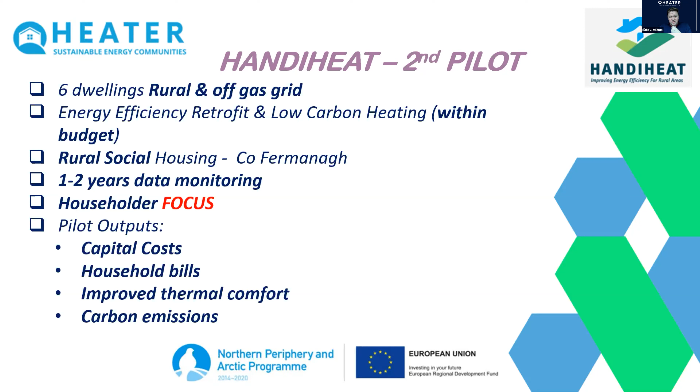In the Handiheat project, we looked at energy efficiency first. We wanted to find a reasonable level of energy efficiency improvements and keep it under £10,000. The actual total cost of the measures we put in was around £8,000.

We wanted to try and get the SAP, the thermal efficiency, up to a SAP band C, primarily through cavity wall insulation, loft insulation, fitting windows to a passive house standard - in other words, using certified passive quality air tape - and non-intrusive air tightness measures where possible.

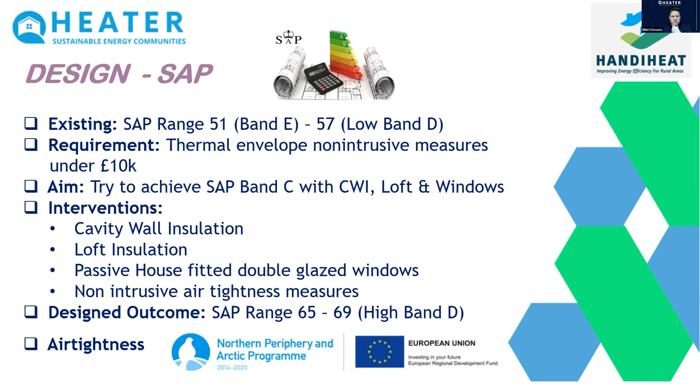The end result, we didn't actually reach a SAP band C with all this, but we reached a very high band D, between 65 and 69. We also looked at air tightness, and we improved it from a range of 10 to 12 down to 5 to 7. So in short, energy efficiency and air tightness was a key pillar at the start of the project.

As you see here, this is the cavity wall insulation, having been extracted and a new cavity wall insulation put in.

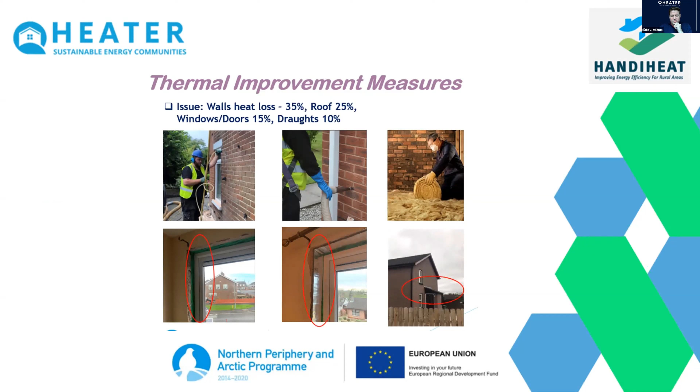Here's the loft insulation that we put up to no more than 400 millimeters. We fitted the windows to a passive house standard, and we put aerogel in it as well. We tried to look at the cold bridging areas and put more insulation there to stop cold bridging and improve the air tightness coming into the property.

We also had two main models. One looked at low carbon heating with the hybrid oil and air source heat pump, and the second used power generation and power storage.

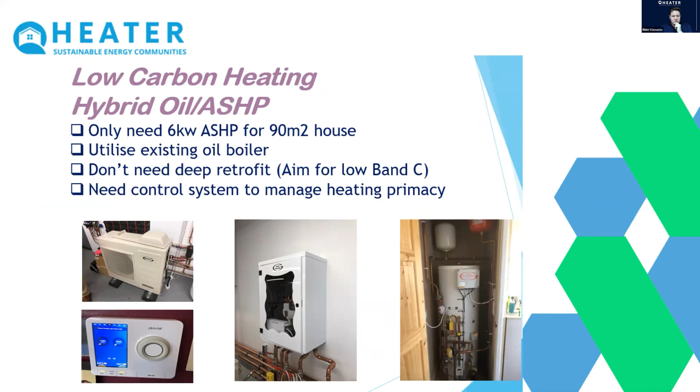First of all, here we used the Grant hybrid heat pump, which is an EvoLink, the small box in the middle. It has a 6 kilowatt air source heat pump, and then a high efficiency hot water cylinder as well. The time clock was a local product from Climote, again because of its functionality and because it's very easy for people to use.

This is a system which was fitted. As you see, there's the air pump with the fan on it, your existing oil boiler, and then your EvoLink up at the top. Your radiators were increased by 50% across the whole house to try and have a greater area to put out the heat from the heat pump.

The aim at the start of the project was to try and give more primacy to the heat pump and then use the oil boiler in colder weather. The initial thoughts from the first winter were to have all heating below 3 degrees used by the oil boiler because it affects the coefficient of performance.

But actually this winter, we haven't got the results in yet. We've increased the temperature to +5 to try and get more use of oil, because we're using very, very little oil in the two houses which we're using.

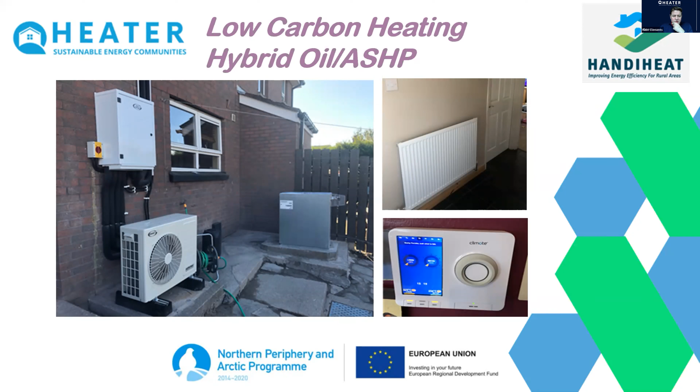The second project we had was looking at energy generation and energy storage. This involved an 11 kilowatt battery and a 2.5 kilowatt solar panel, and then using electric heating with it.

Effectively, what is shown was that over the summertime, there was a lot of export. The tenants' bills were down to around £5 per week. But there's very much a measurable reduction in carbon for it.

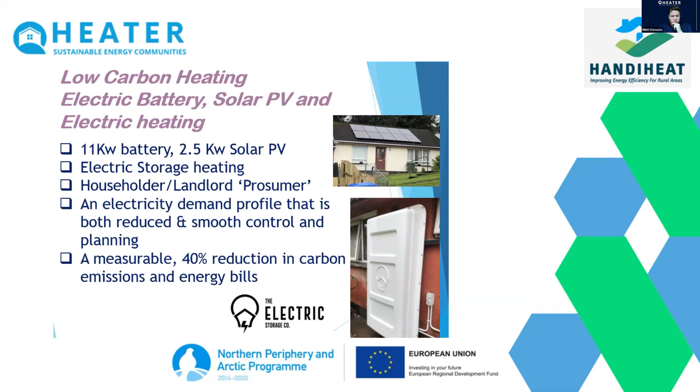But yes, the final results this year will be coming out at the end of March, and we'll have the final report. Measuring the data was very important.

We have all the different system providers with data loggers, and that all feeds into Ulster University. So Grant data logger, Sonnen, we've got our own electric and heat monitors, and then we've got the Climote as well. The plan is all this data will be available at the end of the project, which will be coming to an end at the end of March, although the kit will stay in after that for our heating season.

The initial feedback, and this is actually feedback from last winter, we haven't got the feedback in from this winter. With the hybrid, they were using around £13 to £16 extra in their use of electric, but that's offset by savings in oil.

We're able to look at their previous bills, and we're able to look at the current data on the houses. Going forward, in our next project, we'll put in live monitoring data on which we can see the equivalence of the two things balancing out.

The heat is different. It's better for the planet. It does feel warmer, particularly with the battery and PV houses, and the air tightness had reduced dramatically to between 5 to 7. In context, a new built house will have an air tightness average around 3 to 5. So getting between 5 and 7 is definitely good news for spending £7,000 to £8,000. And as we see, the carbon reduction is cut down by a half.

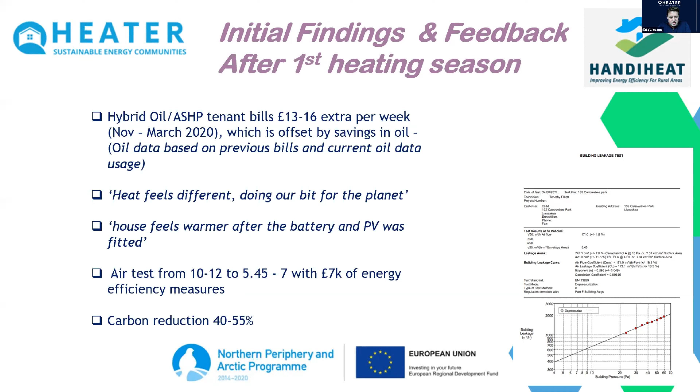Again, this is some initial summaries, and I'm just trying to give you more of the highlight things, some of which is maybe fairly obvious. The capital cost of the heat pump and additional insulation is a lot more than just status quo. We're spending £7,000 to £8,000 on extra insulation, and then there's the cost of the heat pump. The heat pump for this here costs €3,500, and that would be the ex-works price.

The additional insulation, which we've talked about - we do believe, on fabric first, in energy efficiency, and really our current thinking at the moment is we're still trying to develop decarbonised solutions, but we do know solutions for energy efficiency, and typically these houses are only losing 2 degrees heat per night in January.

That was just looking at data over this last month. We've got air tightness between 5 and 7. So the implication is that by spending under £10,000, we are making a marked difference in energy efficiency, and that's something we should be thinking about doing first.

The householder bills area analysis shows an equivalence between the oil cost and the electric cost, but that does not take into account the fact we've spent a lot of money on energy efficiency, and the capital costs aren't included. So that's very much a householder focused issue, with some issues about perception. This is more about behaviour change.

This is looking at our project, which we're just about starting. Whenever you convert from oil to hybrid, the tenants do not appreciate the cost of the oil heating. Typically we're seeing oil usage previously anything from 25 to 35 to 40 litres per week in an average size social housing. But people who have got a gas to gas hybrid appreciate it, because they're paying the gas top-ups every week. So that's a consideration - people do not know how much money they're spending on the product beforehand.

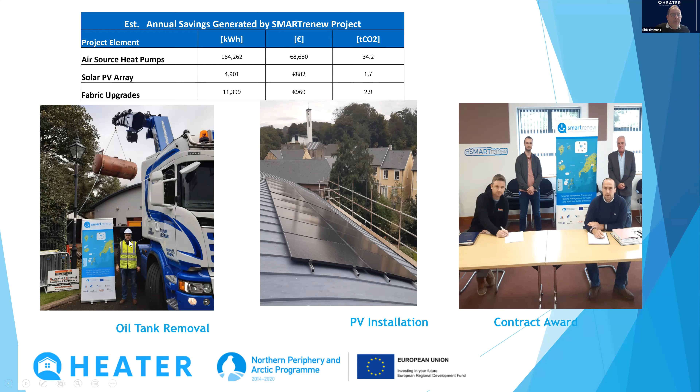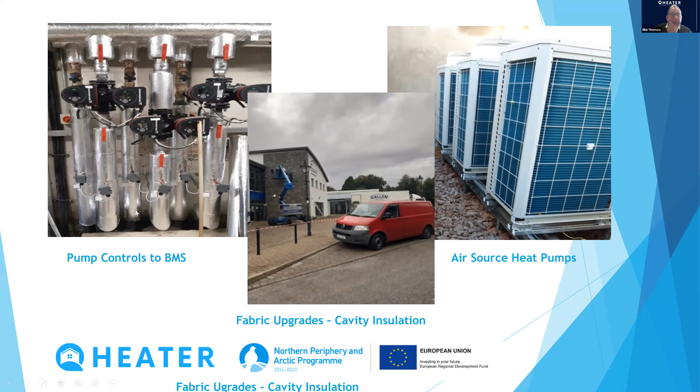Here you can see the air source heat pumps upon delivery, the fabric upgrade with cavity insulation, and pump controls linked to the building management system.

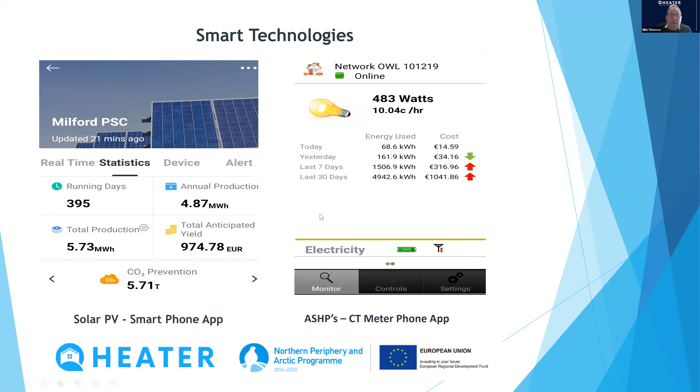So it's been successful, and it's still a learning curve for the council. Things weren't quite as efficient during the summer months as they thought they might be, which was because they switched off their heat pumps earlier. But you can see these diagrams here.

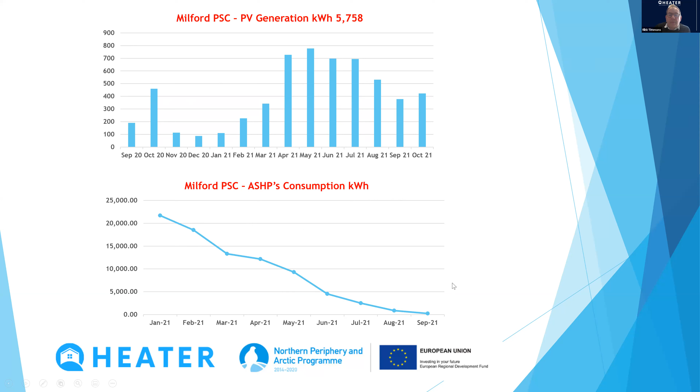You can see the generation from solar energy increasing through the summer months. And on the lower graph, we can see the consumption of electricity.

This covers the period from January 21 right up to September 21. Just on some conclusions before I move on, I'm very pleased with the energy savings they've made already. One of the aims of these projects is to influence opinion and expand beyond the pilots. We're pleased to say that Donegal County Council are beginning to implement this solution on their other council buildings as well, so we're delighted about that.

Moving on to the second pilot I'll feature today, the Derry City and Strabane District Council, where Leo Strawbridge, our partner, is the energy manager. They implemented an intelligent energy management system, or heating management system, for Harbour House, one of their council offices in Derry. They used technology developed and run by a company in County Antrim called HeatBoss.

This provides up to 30% wireless heating savings through wireless heating controls, with lots of advantages in terms of bespoke heating for rooms, automatic control of areas, and setting schedules for heating. We'll look at some of those details.

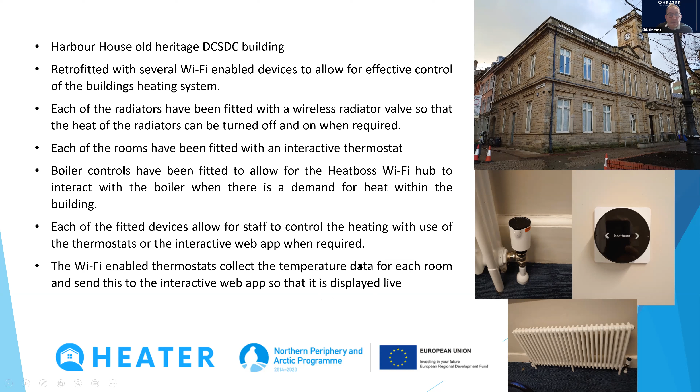These devices allow staff to control the heating using thermostats or an interactive app on the web. The Wi-Fi thermostats also collect temperature data, which can be displayed, and the history of the heating in each of these rooms can be displayed on the app.

These controls also link in with the building management system, and staff can control heat in each room using the Wi-Fi enabled thermostat or through the schedule. Outside of scheduled heating times, the thermostats can be used to boost the temperature in a room when required.

All of the data is gathered. Here are some pictures of the thermostats.

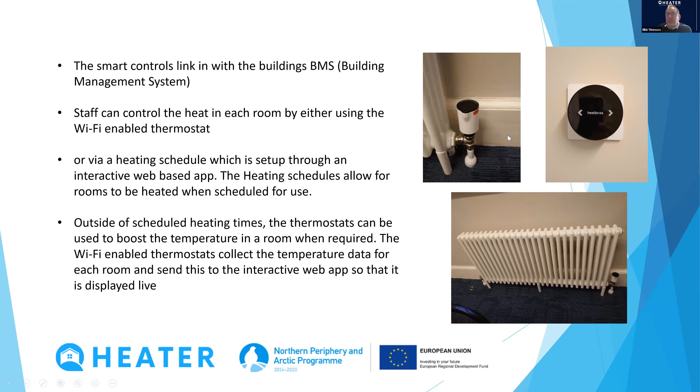The challenges they were addressing were reducing high running costs. They were able to reduce heating consumption by 30%, only heating rooms that were required to be heated and maintaining temperatures well within the limits.

It also provides customizable comfort, so occupants of different rooms can have their chosen thermal comfort. It's a cost-effective, non-disruptive installation, with a typical payback in 2 to 3 years.

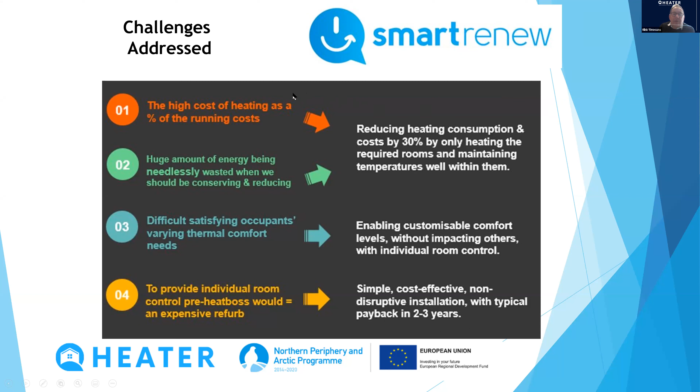That fits in nicely with the aims of the NPA Interreg Energy Priority. The final pilot I'll feature today is our colleagues in Iceland, the Energy Agency in Iceland, Ziggy Fridleifsson and Ragnar Asmundsson.

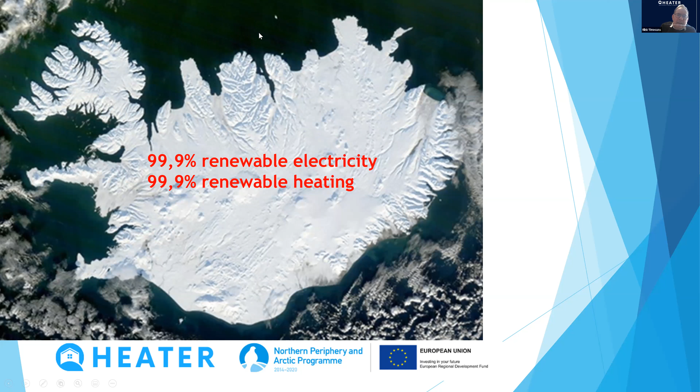Of course, we know where that comes from - mostly from their volcanic hot water, which they use to heat up most of the country. Although there are cold spots, and these cold spots are still reliant on more traditional methods of heating. This island, Grimsey, is one such place.

You can see Grimsey here, a fairly remote place, but it does have a small village with a few hundred people who live here. It's got a church and shops.

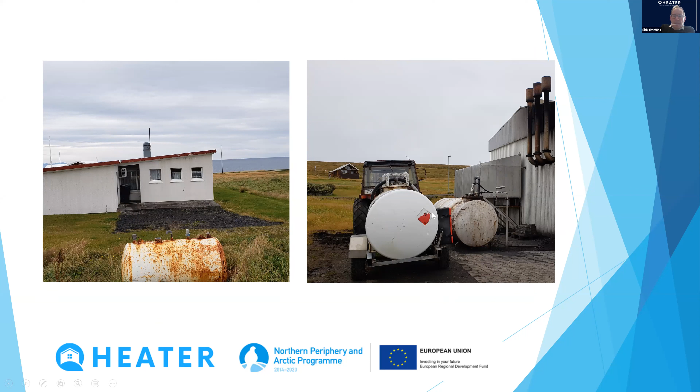I'm sorry, I'll just go back here.

LED lights were being fitted as well, and then they had the practical work of buying and shipping the equipment to Grimsey. They were erecting 2 wind turbines and an 11 kilowatt solar panel installation initially. Of course, they landed in winter on the island and got stuck in the mud and all sorts of things. I've got some pictures of that, but didn't have time to show all of it.

Then they had to make an agreement with the energy company to run and serve the units. It got quite good publicity, even though it's a very small island with a tiny population. It actually captured the imagination of the main country, and the people got behind it, so it got quite a good bit of publicity.

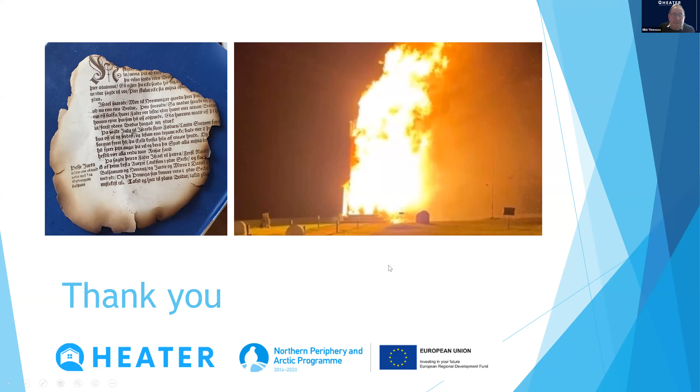At Oulu University of Applied Sciences, we had a smart heat storage combined with district heating to reduce oil use in Kuusamo, which is a Finnish town close to Oulu. This was a large water tank, a huge water tank to store energy in water as heat.

As we know, the capacity for water to store energy as heat is much more efficient than actually driving water down a mountain through a turbine. So it's become more and more popular as a storage method, and this project was also about storage.

We looked at patterns in the Faroe Islands. Bjarni combined borehole thermal energy storage with water storage, ground source heat pump, and PV panels, and he applied this on their actual Environment Agency building. So they're very much looking into borehole technology, geothermal technology also.

One of the side experiments of that was to actually, in a 400-meter borehole, experiment with storing heat in rock down there, as well as storing heat in water. So that's an ongoing experiment.

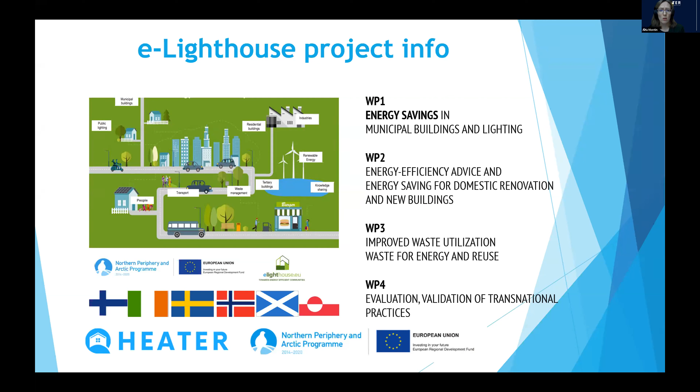And here you can see the partners we have. So we were in Cork, in Oulu Finland, Sweden in Umeå, city of Umeå and the University of Umeå, Norway in Bodø, and then we had Scotland and Greenland, Sisimiut in our project. And then we have the Nordland Research Institute. So here we have the partners who were working with this project.

So what happened, the goal was to support and follow up the retrofit of more than 250 public buildings. They were retrofitted, there was 5% less energy and 3% more renewable energy sources. There was maybe some problems with the renewables because the baseline was very different in each country. And this procedure included 40 deep renovations also.

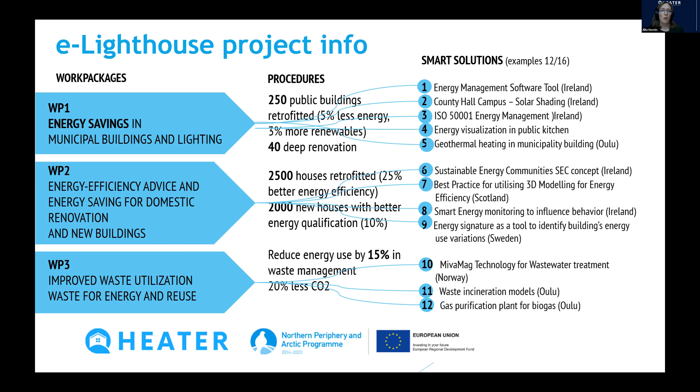And here's the work packages and the results. It was from March 2019 for the final seminar. I will go to this energy saving in municipal buildings. So there was around 240 retrofitted that was done, and 2,420 houses was also retrofitted, and that was done. We succeeded with the new houses quite well also.

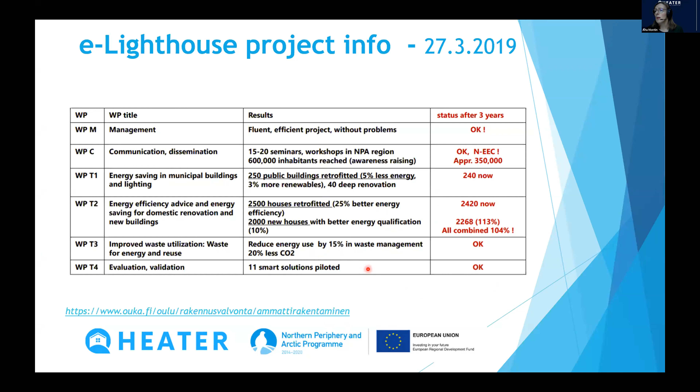And we have, with the evaluation, 11 smart solutions piloted. That was done in this project. We have 3 examples here, quite simple ones, of what was done in this project. So I have example 1 from Sweden.

It was for energy savings in municipal buildings and lighting. I wouldn't say it's a very, very rural area, but it's kind of a rural area in Sweden, in the northern part of Sweden anyway. So the target was to save energy. What was done, it was 44 buildings with improved energy efficiency, mostly schools or preschools.

And implemented actions include LED lighting. This was quite a big role, and then there was some ventilation upgrades done and upgraded steering and control system, more about behavior, and we have some digital control systems in these buildings.

And here are the energy saving results. Total energy saving in these 44 buildings was around 4.2%, which is quite much in northern countries. And we have to remember these buildings are not very old ones, so they were maybe not so in need of retrofitting.

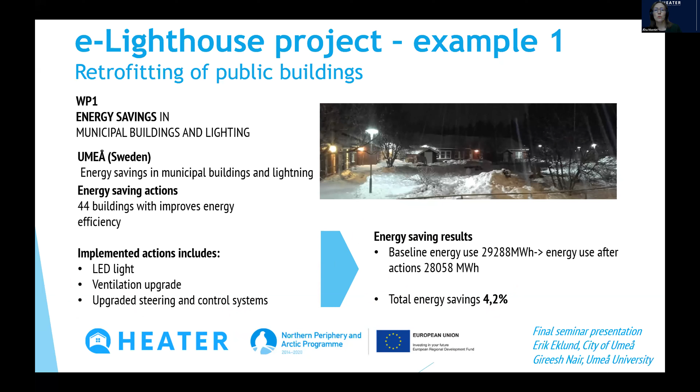So that included 180 households with improved energy efficiency in this project. The actions included heat pumps, which is quite an international way to do it. So you have air heat pumps, more insulation of attic or walls, mostly insulating the attic is more efficient. And of course, the behavior actions and guidance for inhabitants.

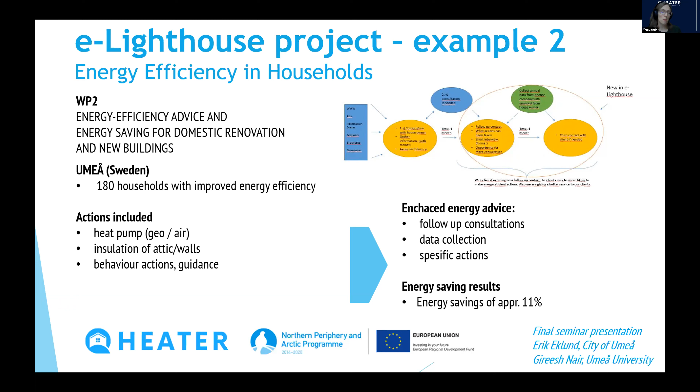So this is the last of the examples. We are going not to Scotland, as I said before, but to Ireland. And this is more kind of the practical solutions.

This is also energy efficiency advice and energy saving for domestic renovations, with 24 retrofit measures evaluated in this NCE Insulation Ireland project. NCE Insulation is a community-based, not-for-profit organization delivering energy-saving measures to homes across Ireland since 2003.

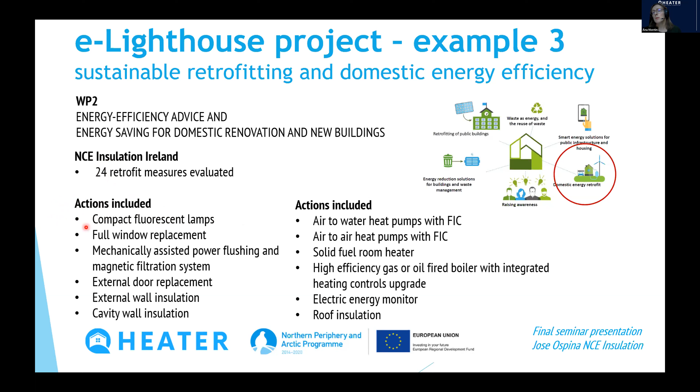The actions included in this project are listed here. There were 24 of them, but I have just the most important ones listed. It's about compact fluorescent lamps - let's see, the next one is maybe easier. Here you can see the total numbers done with these procedures: change of lamps, full window replacement.

These measures or retrofitting approaches are quite different from what we would do in Finland. But you can see the baseline of these buildings to retrofit was quite different from what we had in Oulu. So we maybe wouldn't use the same kind of measures, but these were very efficient in Ireland.

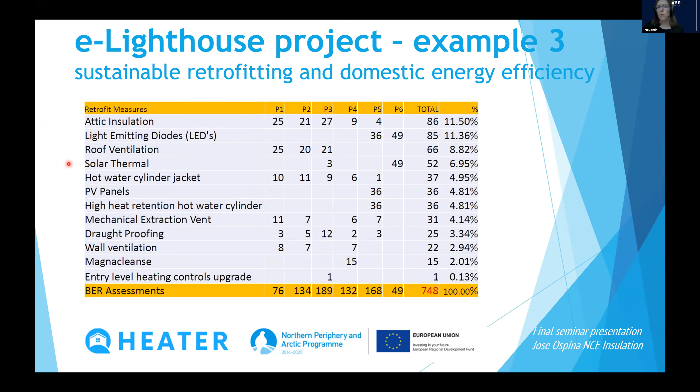I'm not going to study this more carefully, maybe you can get the material from here, you can see what has been done. I have just two points here with the kind of basic measures done: cavity wall insulation and the heating controls upgrade done in these buildings.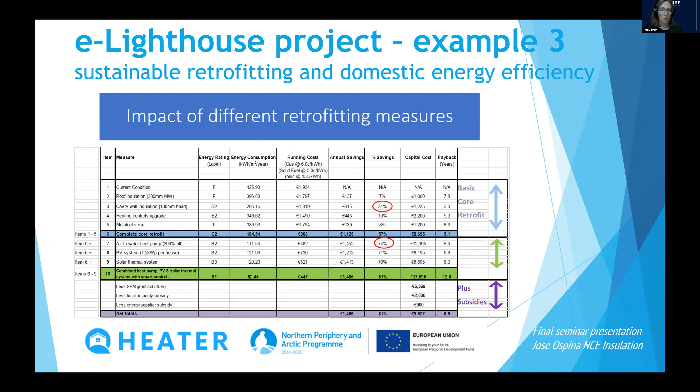After this, the effectiveness of the air to water heat pumps was just enormous in this project. For the last two slides, I have some pictures taken from Ireland, so you can see the heat pumps done. This is something we couldn't do maybe in Finland because there's not power enough for our buildings in every case to cover the need of energy, but this was a working system in Ireland.

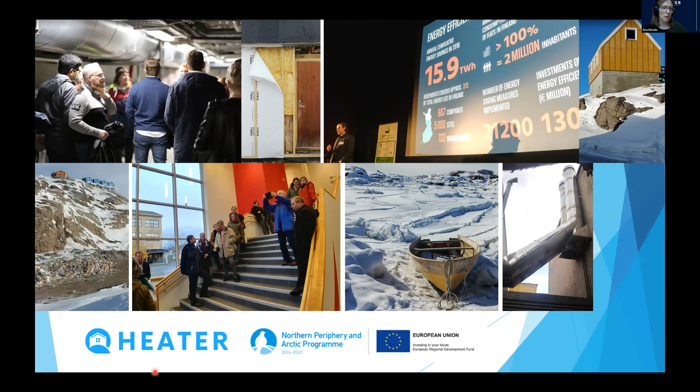You need to open your microphone. Sorry, you're on mute there, Robert. You're still on mute. Okay, sorry, yeah, probably best just for me is to keep me on mute.